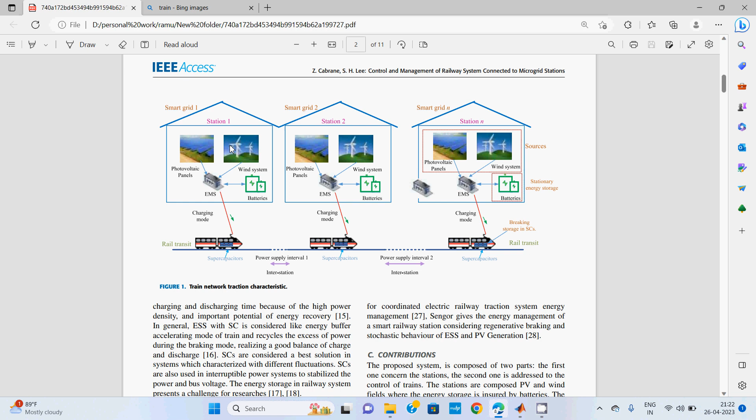So, majorly the proposed design focuses on the electric train. If you consider the electric train, what are its disadvantages? The major disadvantage is energy recovery during the regenerative braking time period. Why? Because electric motors have a main disadvantage: during the regenerative braking time period, we need to track the energy or power.

So this is the major disadvantage, and also while using supercapacitors, the charging time period of the trains will be large. That is also one disadvantage. So in order to reduce these overall parameters, we are using an energy management control strategy. It is mainly used for low energy transfer, I mean low burden on the design, and also fast charging. For these two purposes, the control strategy plays a major role.

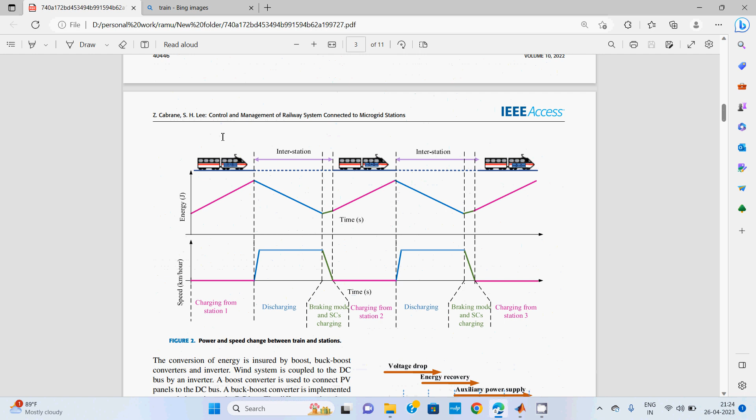So in this model, I will show you the block diagram. You know that the electrical vehicles here are simply electrical trains. It starts from charging station one. If you consider a particular time period, the trains will consume energy like this. At a particular time, the supercapacitors inside the train are going to store the energy.

Then at intermediate stations, the train is going to discharge. So this is the regenerative braking time period. So in braking mode, the supercapacitors are going to charge. That is an advantage of the proposed design. So this is the overall proposed design.

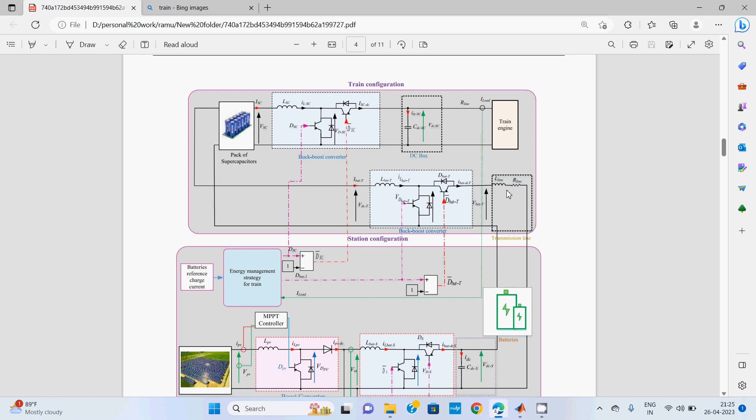In the train configuration, we are using a pack of supercapacitors, a buck boost converter, the train engine, and also a DC bus link. The pack of supercapacitors is directly connected to the buck boost converter of the transmission lines, that means a 25 kV line. Then it is connected to the batteries, and the batteries are connected to the buck boost converter and to smart grid 1 and 2. In smart grid 1 and 2, we have batteries, photovoltaic panels, and a wind energy system.

I will show you in Matlab. So this is train 1 and train 2. These act as distributed active loads, and they are connected to the smart grid. This is the overall smart grid structure: smart grid 1 and smart grid 2. In smart grid 1, we have solar panel power generation and wind power generation. And here we are using an MPPT controller to boost the PV voltage.

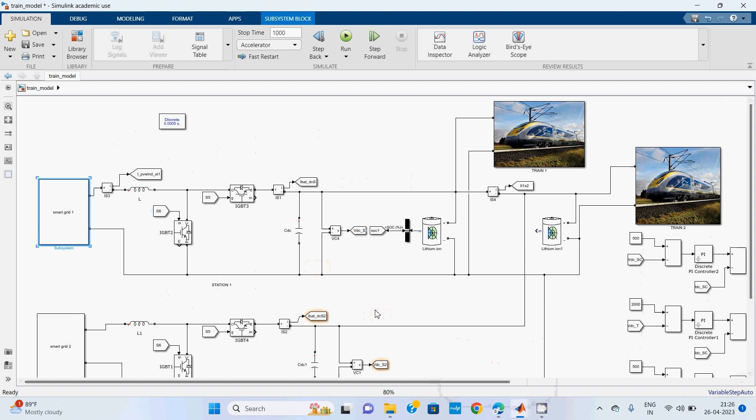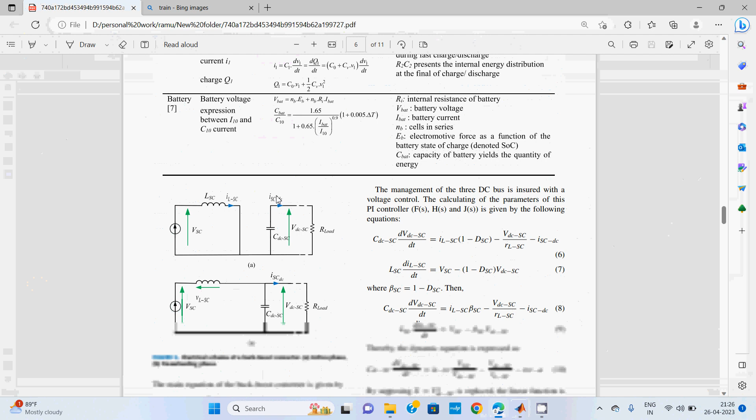And here we are using a bidirectional buck boost converter. So this is the overall constructional diagram of the proposed one. And the control strategy used here will be as shown in the energy management control scheme. This one is the block diagram of the energy management scheme. Whatever control I proposed here totally depends on this one.

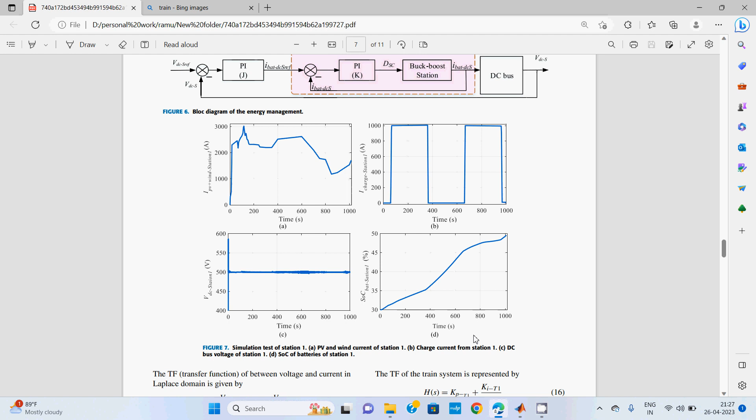So now move on to the simulation results. In figure number 7, we are observing the total current induced at the station 1 terminals. That means PV and wind current. I will show you here. I just run the model.

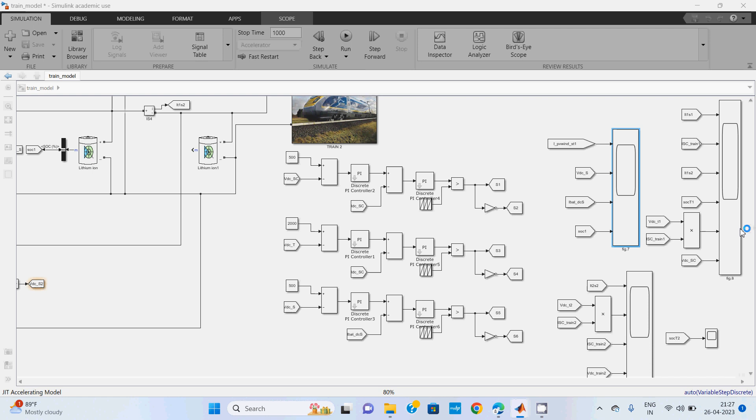So I just go through the train model. Inside the train model, what blocks exist, I will show you here. According to the design proposed in this paper, the train model contains the train engine. This one is the train engine, and DC link voltage. This one is the DC link voltage and buck boost converter, and using a pack of supercapacitors. So I am using a pack of supercapacitors here, a pack means a number of them.

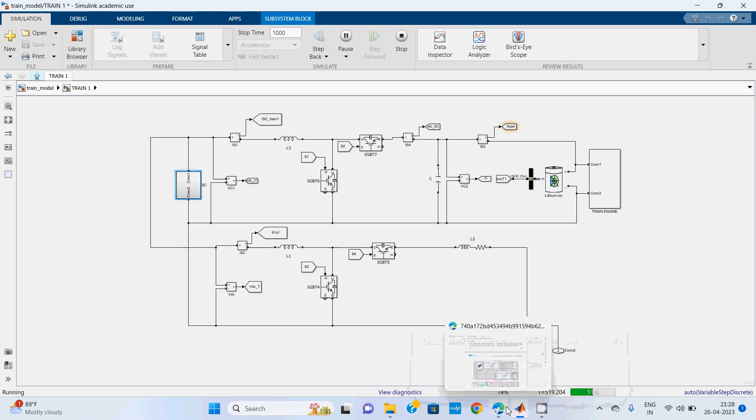Why? Because supercapacitors means large rating of the capacitors, right? So a number of capacitors will be connected in this manner in order to create the supercapacitor, and then given to the buck boost converter. So in this design, the buck boost converter plays a major role. Why? Because, as you already know, here buck boost converter means bidirectional DC-DC converter. That means for a certain time period it will act in charging mode, and for a particular time period it will act in discharging mode. So that is the advantage of the bidirectional DC-DC converter.

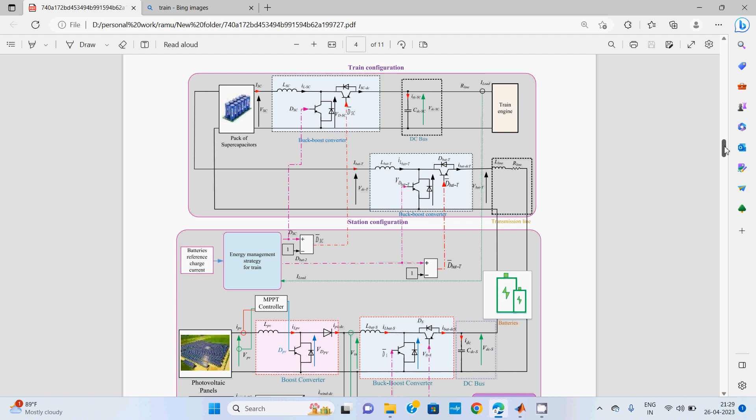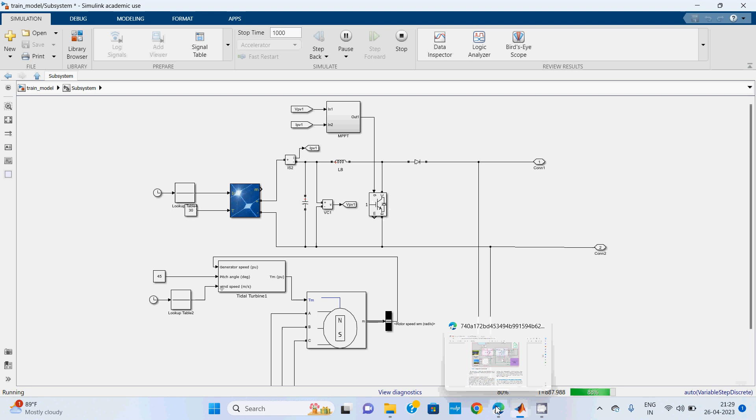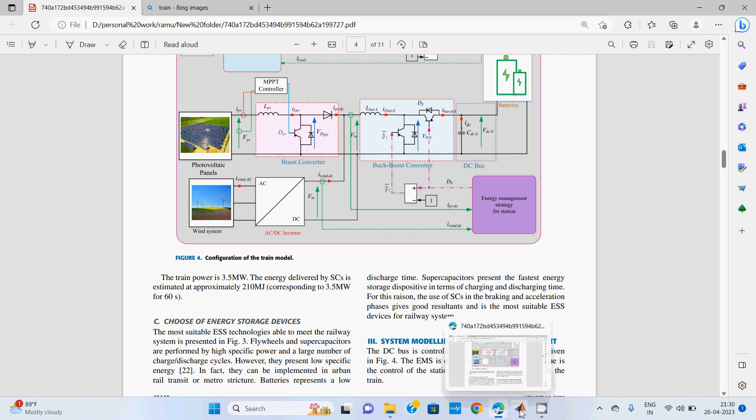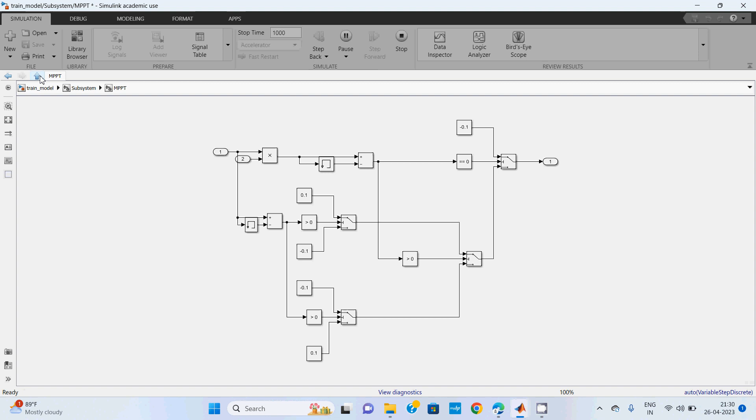As well as the similar diagram in train 2. And also in smart grid 1, in order to generate the duty ratio for the boost converter, this is the boost converter, right? So in order to create the duty ratio, DPV means duty ratio, we need to implement the MPPT controller here. So the MPPT controller is this one. Its major role is to create the duty ratio. So this is the overall part regarding the constructional diagram related data.

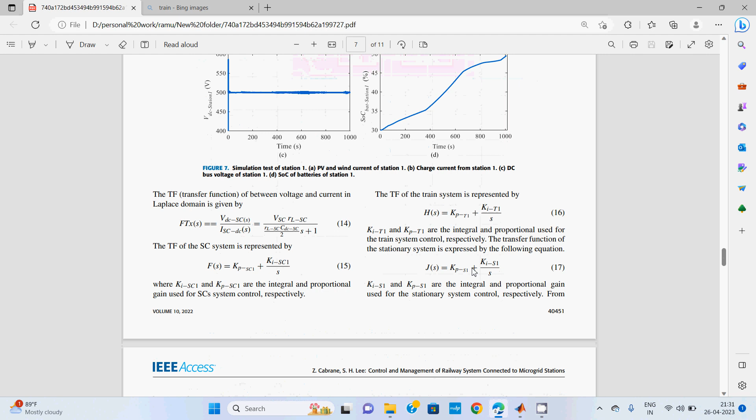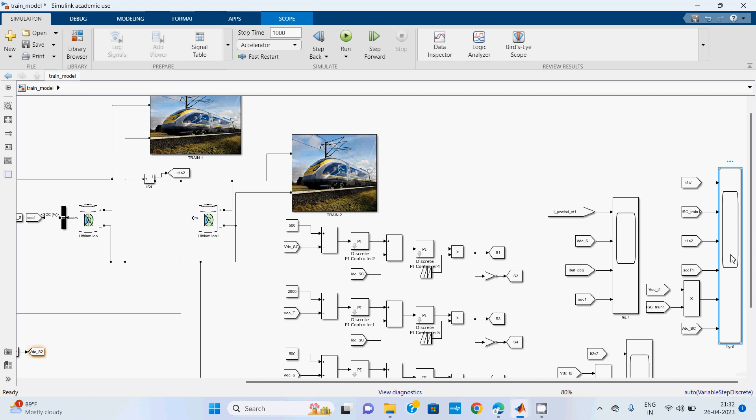Now figure number 8. Here I am using train 1 to station. I am just considering train 1, the charging current of train 1 from station 1. And also we need to take the charging current of train 1 at different time intervals, station 1, station 2, and load power across the train. I will show you in the simulation diagram. So this is the simulation result for the charging current of train 1 at station 1 and station 2. With respect to the trains, we need to consider the charging currents. So this is the overall structure regarding that.

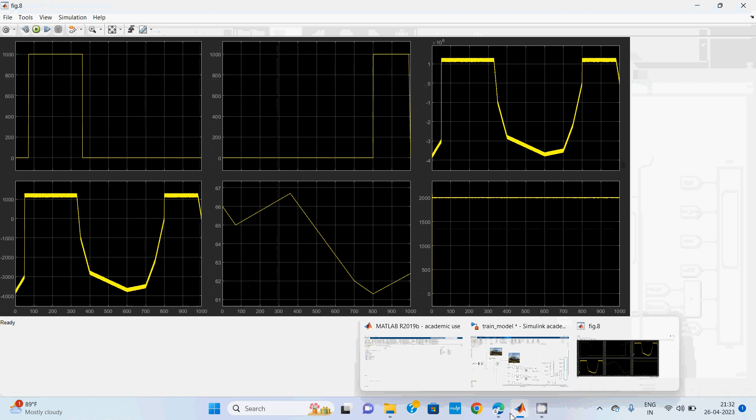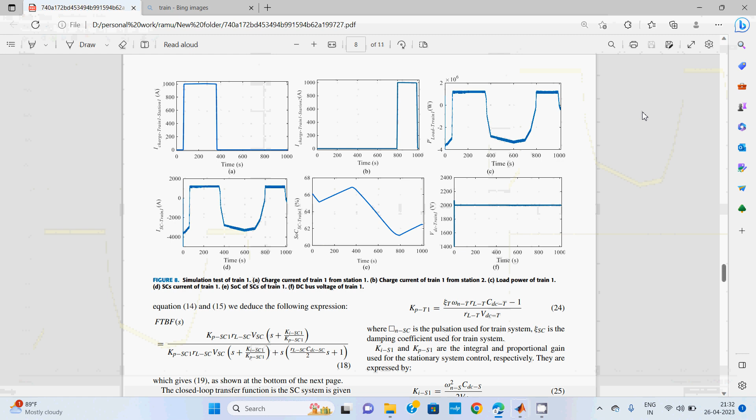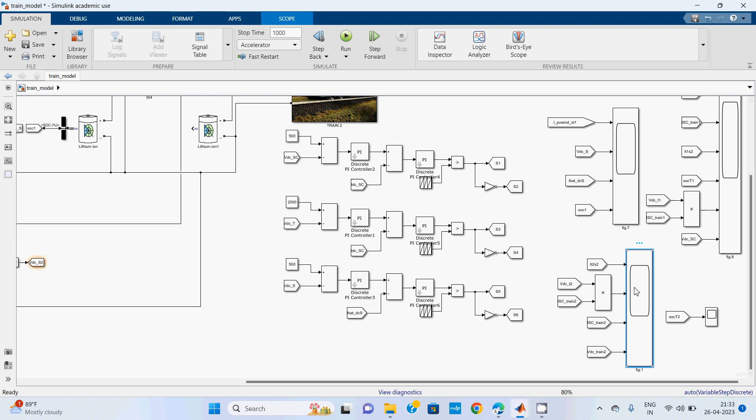These are the simulation results regarding figure number 8, as well as figure number 9. Same parameters when the simulation test is considered at train 2. Previously we considered train 1. Right now we are considering train 2, with the same parameters. So these are the results regarding that.

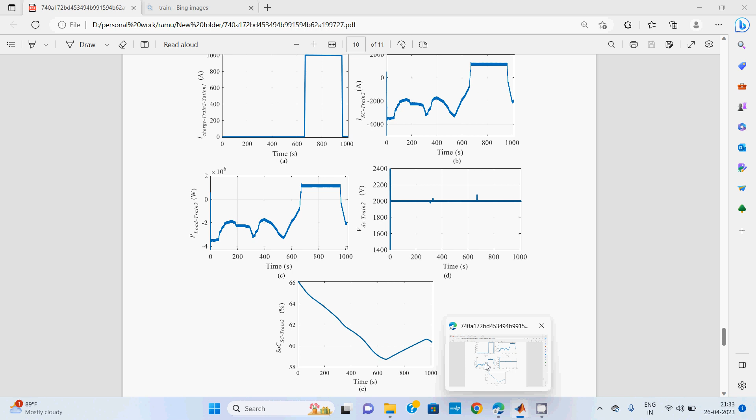Charging currents across train 2, charging currents across train 2 with respect to station 1 and station 2, load power across train 2, VDC terminal voltage across train 2, and state of charge across train 2. So this is the overall topic regarding the control and energy management of a railway system connected to the microgrid.